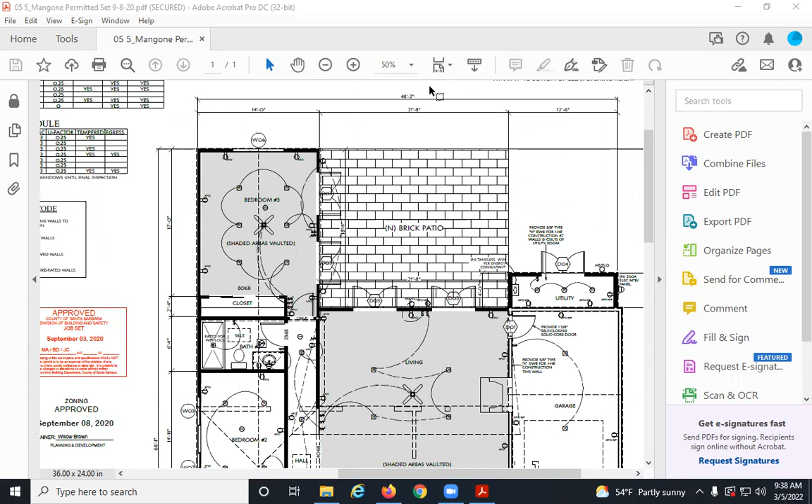I'll tell you, when we get into plumbing, which is really soon, I will show you some stuff about this house. But I'll tell you right now, since I'm on it, that this house had existing plumbing.

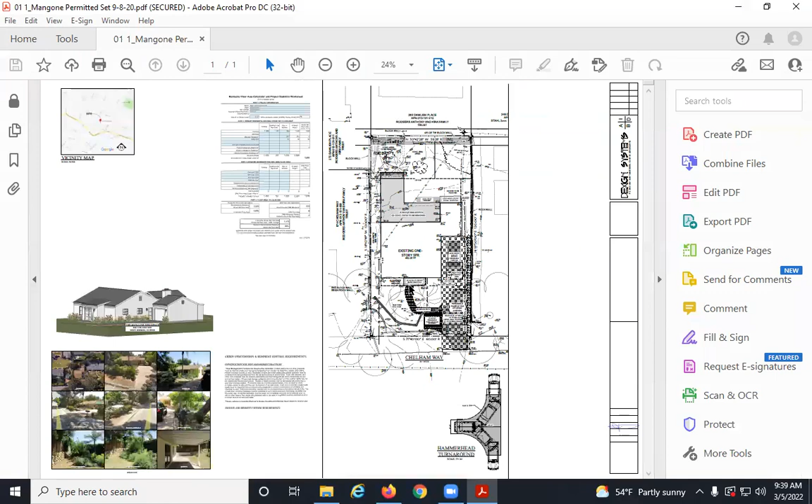So before this addition, there was a big clean out right here. You know what a clean out is? What's a clean out, Frank? It's kind of a threaded ABS plug that goes into the waste part of your plumbing. Clean outs have a plug, but a clean out is a way to get into your waste to snake it. And they're required on all your waste.

And by the way, I'll tell you right now, four things you need to know about plumbing: water, waste, vent, and shit rolls downhill a quarter inch to a foot. That's all you ever need to know about plumbing. If you know those four things, you can be a plumber too.

So waste needs to be snaked occasionally for roots and other things that happen in your main waste, where not just your sewage goes, but your showers and your gray water, all that stuff goes into your waste. And we had a big clean out right here.

Yeah, clay pipe cleanout. So we knew where the sewer was, and the cleanout was just opposite this existing bathroom. So I figured that everything came across the building from the laundry side here, this way, and the kitchen sink this way. It came straight across, bathroom here. Everything went under the slab. All this waste went under the slab and came out, and the bathroom did too. And I figured everything tied in right outside there. That's what I figured.

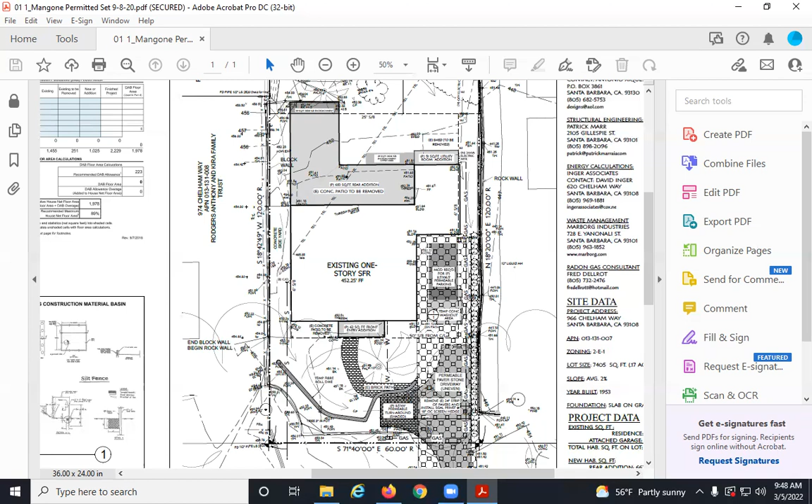So we put in French drains and excavated down about 14 inches. We put back in about 6 inches of 3-inch crushed rock, then a few inches of 2-inch crushed rock, then 3/4 crushed rock, and ultimately an inch of 3/8 pea gravel, about 60% Hanley gold and 40% washed pea gravel, for a finished look. What we made was a big collection basin where water could go and disperse, more like a dispersion basin, with nooks and crannies that water could go through to get down to groundwater. So far, so good. It's worked really well.

Did they plant around it at all? Well, you have to see it, there's a hedgerow and a couple big olive trees. Yeah, they've got some plantings, but mostly just plantings and gravel. She just wanted gravel everywhere. She's really interesting, I really like her, I had a blast working with her. She's got excellent taste, just an absolute sweetheart. Her husband's a super nice guy and an incredible golfer. I hope they watch my YouTube channel so they can see how good I plug them.

When you say Hanley gold, are you talking about the California gold kind of gravel? Yeah, Hanley gold and California gold are pretty much synonymous. It's a gold colored gravel, typically in 3/8 size.

But here's our roof plan, and we did some interesting modifications. I pretty much had to design as I went in some ways. This is the kitchen along the driveway. She wanted another window, so we put 3 windows on that side.

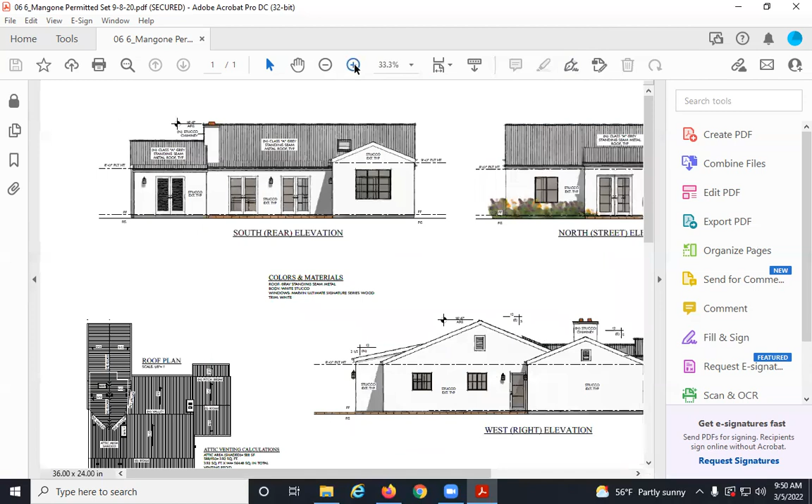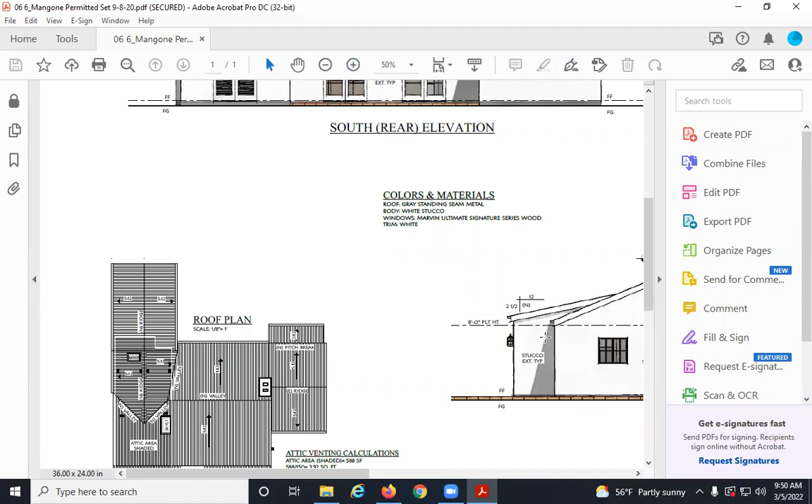Some of the things required on plans are elevations, north, south, east, west, just like that, and that has to be on a plan. That's pretty important because it's the only place you'll find things like the height of the ridge, the plate line, what your gables do, and the height of doors and windows. This is the only place you show your plate height. You don't see it on floor plans, and you won't see it anywhere unless you have a complete section through the walls, which in some cases you should. I like those on plans, but showing plate height is pretty important.

This also shows what the roof does and what the pitches are, and it tells you about required venting, how much venting per square foot you have to have. We had to have a bunch of vents because we didn't need to vent our volume spaces, but we had to vent our unconditioned spaces where we had attics. Rather than show a bunch of dormer vents, we did an attic ridge vent, so the ridge acts as a vent. It's got honeycomb, sticks up a little higher, and that got us the square inches we needed to vent our roof, because you have to vent unconditioned attics. You have to vent them at either end if it's a gable, to get air passing through, and then vent them out too.

It's really important to keep the difference between ambient outside temperature and the inside conditioned temperature from being too radical a change. Attics especially really heat up, so you've got to have a place for that heat to dissipate, which is what those roof vents are for, and the gable end vents move air through to circulate dead air.

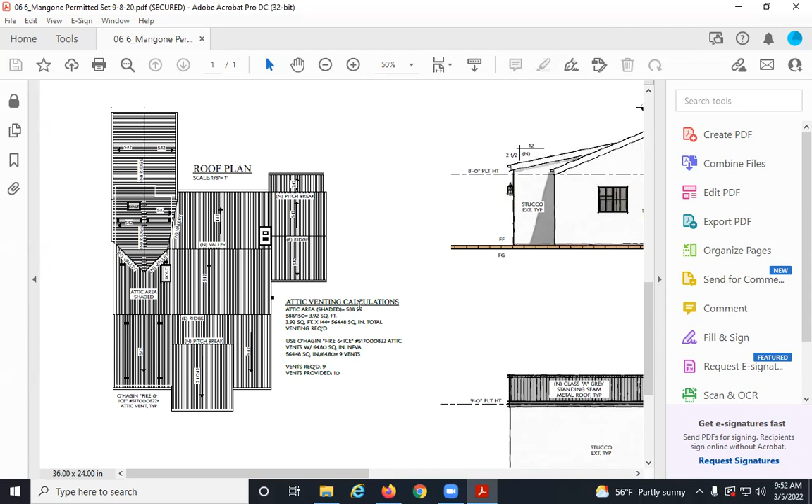Then we had to do stuff like, because there's nothing shown for insulation, what they show on the boilerplate is standard roof insulation, like an R30 or something. We can't do that here because we're showing all the way up, the bottom of the 2x4 rafters, the sheeting on top of that, all the way, we're not covering anything. Because we're leaving these trusses, which you saw pictures of, the site-built trusses that were all stained, we couldn't skin the bottom of the rafters because we'd have to cut around way too many connections, there's connections every 2 feet on these trusses.

So we had to insulate above, using a rigid insulation that would conform to get the R value we needed. We did extra sheeting on top, and then put in 2.5 or 3.5 inches of insulation, which gave us the R value. We had to build 2x4 on end nailing on the roof to drop in the insulation panel.

So we had nailing, and then plywood on top of that, and then the roof on top of that, the metal roof on top of that, which is a 17-inch standing seam roof. And as we go along in classes, you'll see more and more.

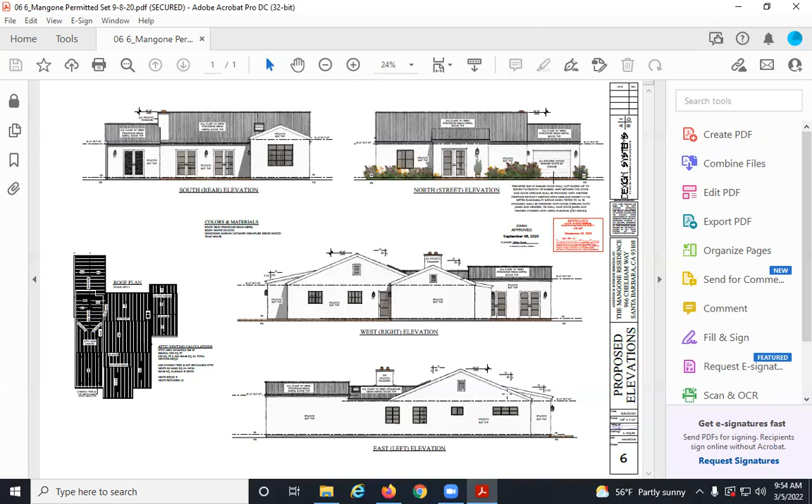Well, there's all the roof pitches. I'm spending some time on this, but I wanted you to get a sense of the site and the plan, and then we get into the meat of it. We get into some details, which that detail never happened.

I don't know why that's there. That detail never happened.

Did you have to shore all those trusses in order to get that beam up in the back? Yeah, we just had to build a wall all the way across, because the trusses ran lengthwise and set on that wall. So we built a temporary wall, removed it, put in the post and beam, and all that stuff. The footers were already there, and then we took away the temporary wall and hung all the ends of the trusses.

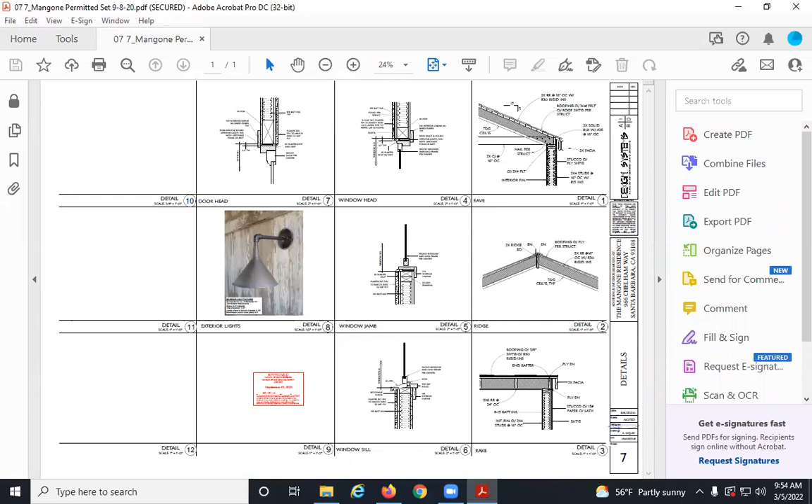I think you might show a detail, and this is actually more like what we did. This is an actual detail, this one here. But even then we modified it because she wanted, she didn't want that space. And she wanted it as narrow as possible, she didn't even want a fascia, so I had to have the framers rip off the fascia and then rip it down to make it even narrower.

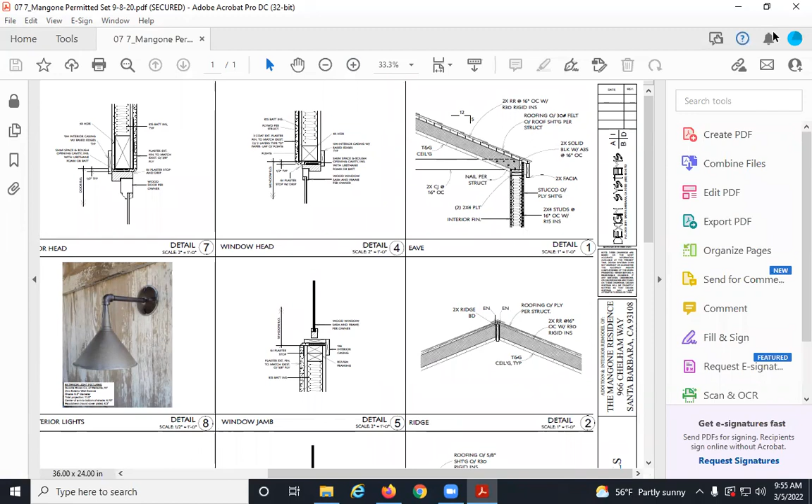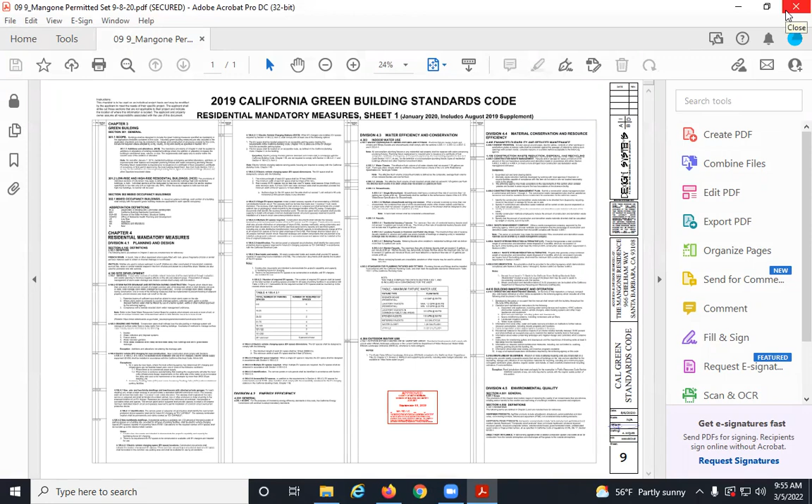See what else we got here. So then again, green building code stuff, a bunch of boilerplate stuff, and then we should start getting into engineering here. No, a bunch more mandatory measures, water efficiency, material conservation. It gives me a stiff neck just thinking about all the stuff that they have asked us to conform to.

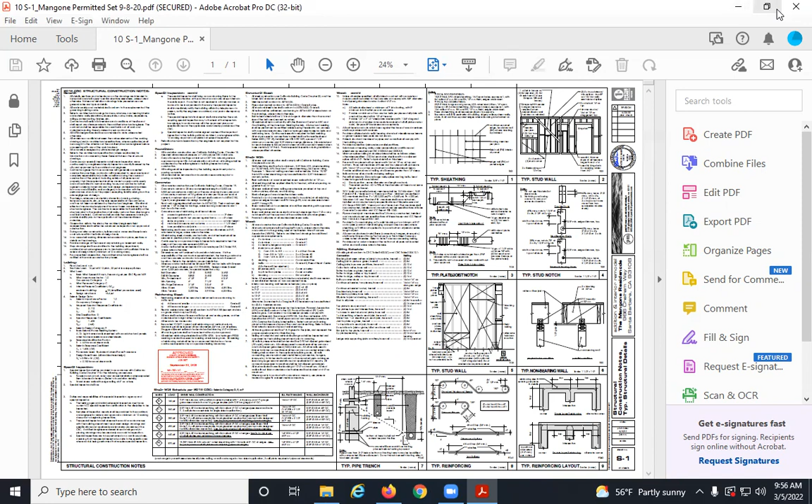Now, this is boilerplate, and it has to do with how you use steel and footings, how to bend steel and what's acceptable. Again, pretty much all boilerplate. Now we should be getting into, that's S1, so that's boilerplate. Now we get into some actual details, tying into the existing footing with the new slab. All these are actually real details that we actually used.

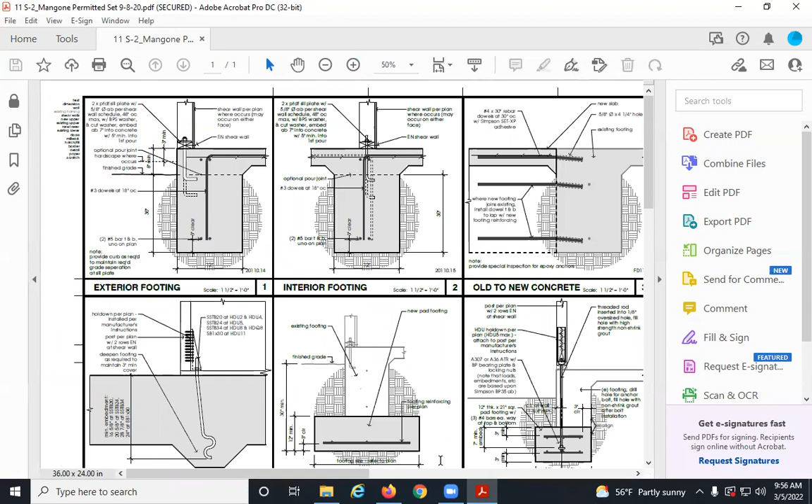And then you see, we start getting, this is where our foundation plan is. In the foundation plan, you have these things like, see that P1? See all the triangles, P1, see the P3 there? Everybody see that? So the triangles, P1, right?

And the HDs, did Jim tell you all about those, when you guys went over the foundation stuff? HDs are your hold downs, and they're rampant. There are lots of them in every foundation. And they have an anchor bolt that's an S shape that goes deep into your foundation, that's poured into concrete, and then it has a threaded 5/8 bolt sticking up.

And that gets an HD, a fabricated metal device that's screwed to a couple of studs together, or a 4x4 or a 4x6. It'll call it out, and it basically ties that part of the building wall to the foundation really well. And the whole idea is that if you get in an earthquake and your house starts jumping around, it won't jump off the foundation. That's what the HDs do.

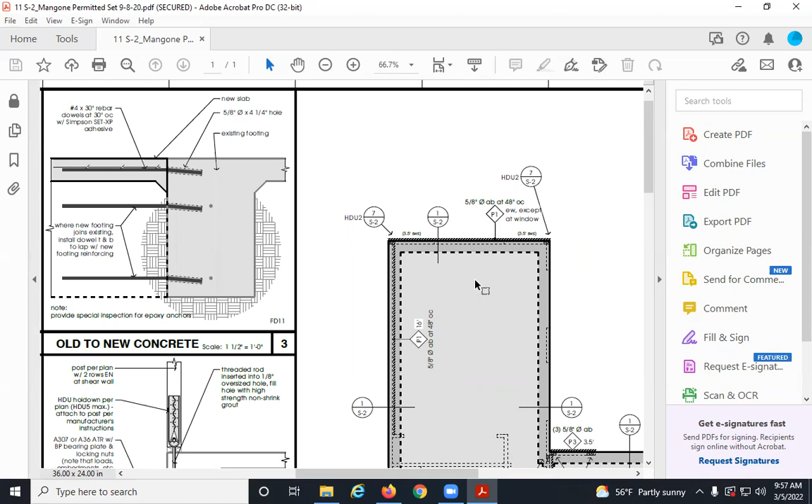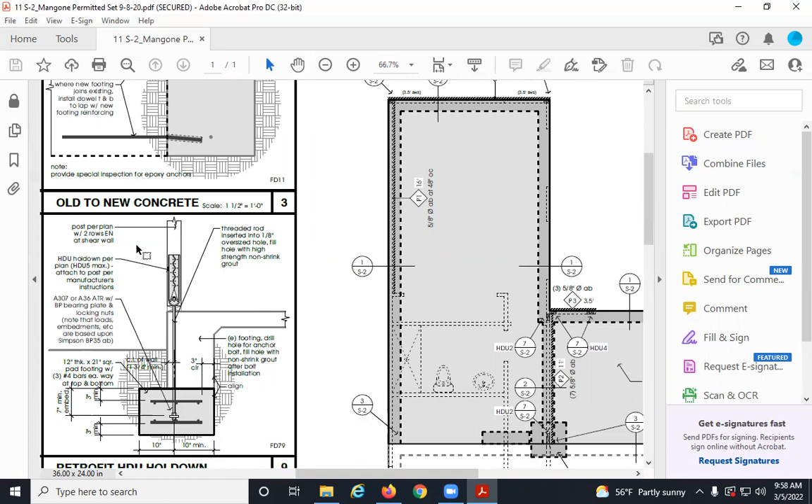And there's what they look like, right? And then these stabs go all the way down, big stabs. And then these guys are screwed with SDS screws, really gnarly. It drives itself, screwed with an impact driver, into the posts, right? And it shows you edge nailing, and then the P's, all the triangle, the diamonds, those are all for your shear walls.

So all your walls are sheeted, but some of your walls, interior and exterior, are considered shear walls. And they shear and rack the building. Again, it's for seismic, to keep your building from collapsing.

And they're very specific, and they're looked at by inspectors specifically, and they're almost always called out on your plan as needing a special inspection, just like your hold downs do. So your foundation hold downs require a special inspection, and all the nailing, basically all your straps, hold downs, and builder's hardware are going to need to be inspected.

That's going to need to be inspected and signed off that they're there and seen by a special inspector, not a county or city building inspector, but somebody you pay, like Rusty at Coast Valley or Pacific Materials Lab, Ron Pike. Those are pretty much the two guys that do it. There are other guys that do it, but those are the two companies mostly used around here, and they have to sign off that your shear is done properly per plan.

And per plan is how many feet of shear there is. Now, the whole building is sheeted with the same stuff that you shear with. The shear has to be a certain type of material, and it has to have the stamps outside where you can read them. And then it has to have edge nailing and field nailing per spec. The edge nailing, EN, is usually anywhere from 4 to 6 inches, all the way to 12, but usually 4 to 6 to 8 inches on the edge nailing, and then field nailing is anywhere from 4 to 8 or 12, but it's very specific.

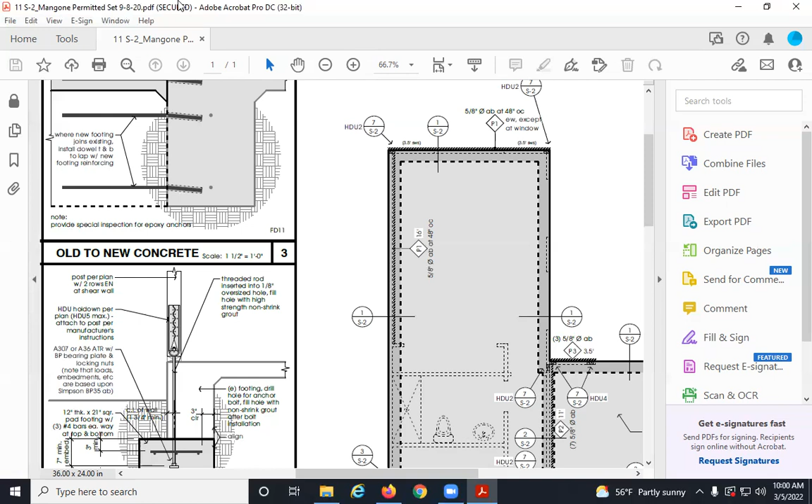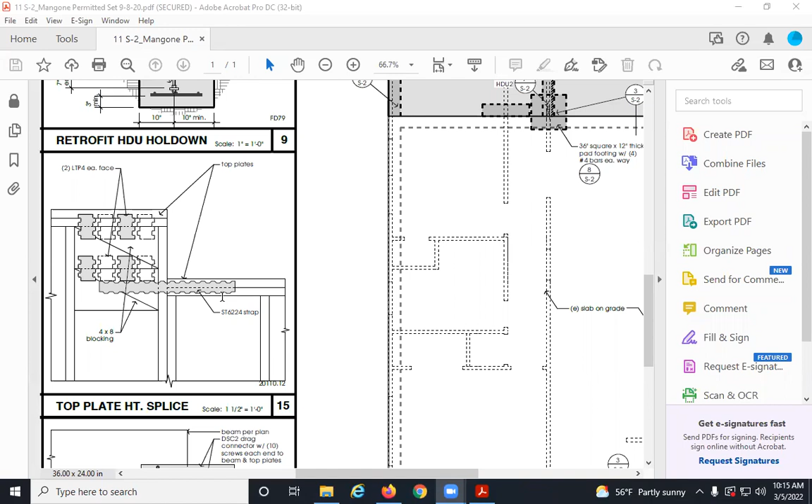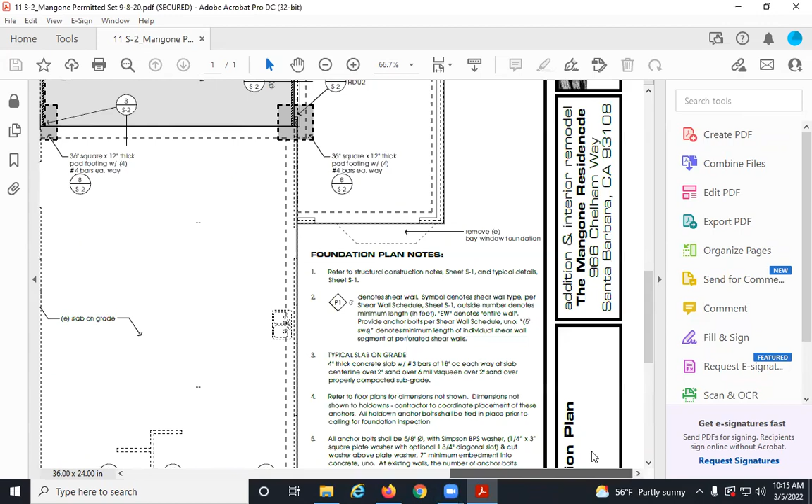Okay, so these straps, like for instance, this 15 here, right? Reading a plan, this is going to be whatever the sheet is. I think it's S2. So S2, detail 15.

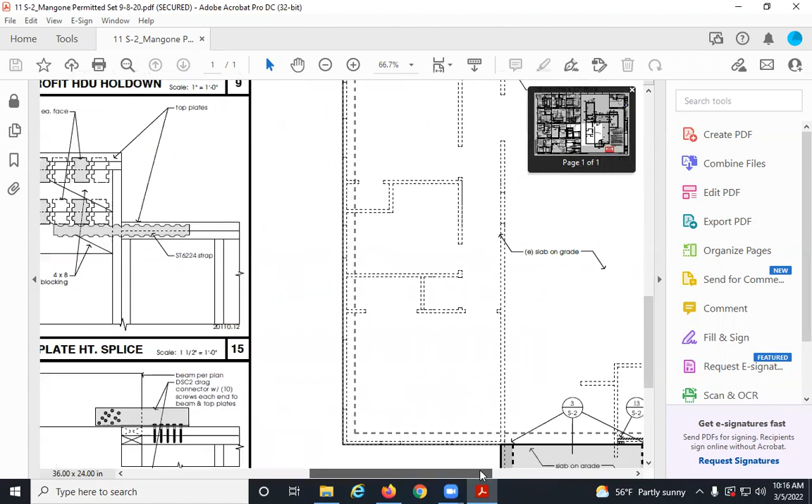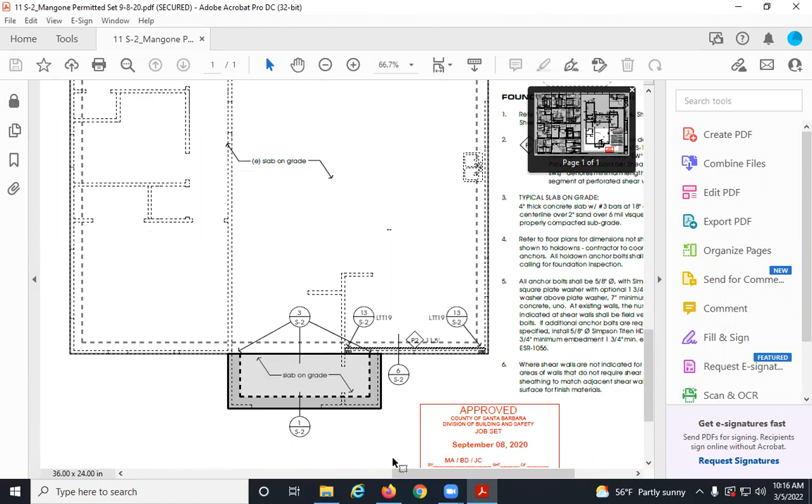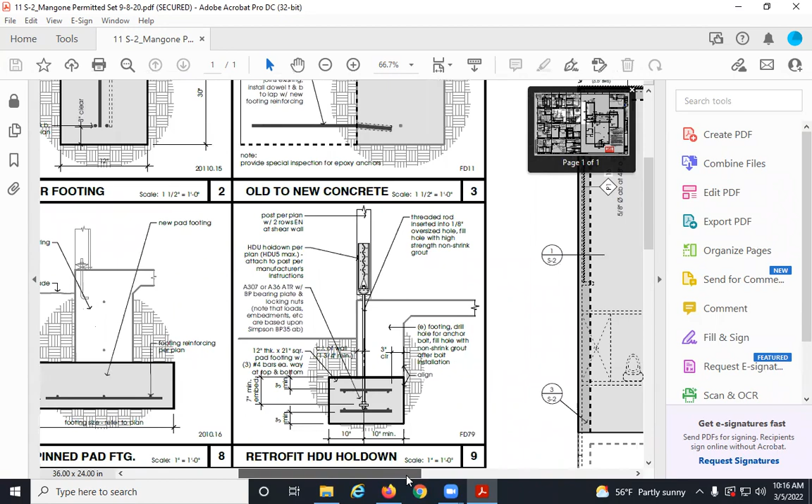Top plate splice, right? Let's see if we can find that anywhere, just for the heck of it. There's 13 on S2. I don't see 15S2, just out of a cursory search. So let's see what 6 on S2 is, detail 6. Back and forth. Wait, where's 6? There's no 6. Well, that helps a lot. On S2, I don't see any detail 6.

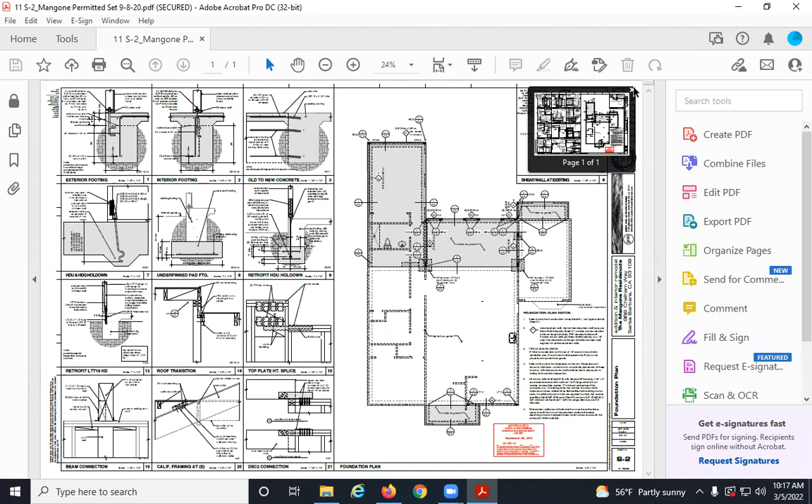So what's going on here? Am I just... 1, 2, 3, 6, 7? Wow, how about that. On the right. Where, here? Yeah, right, oh there, yeah, shear wall? Yeah, that's detail 6. Thanks. Wow, interesting place to put it.

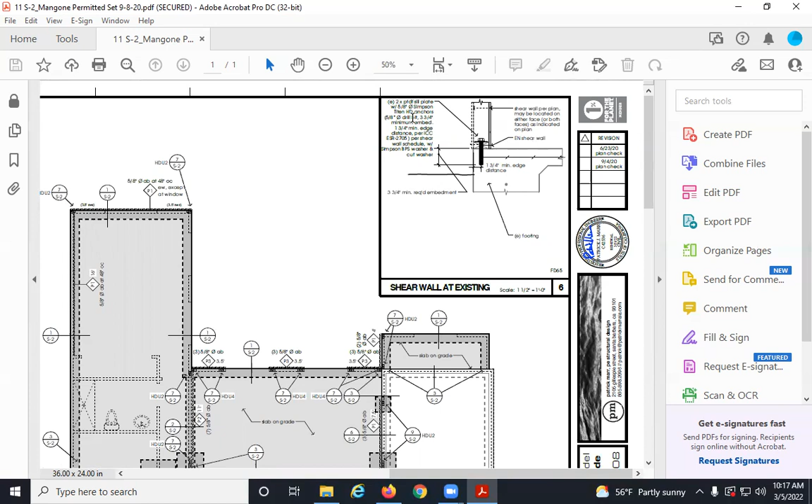So that tells me what it needs there. It needs a Titen on an existing shear wall. It calls out the plate with a 5/8 Titen.

So what it's telling me is up here, right here, that's an existing 2x4 wall. We didn't have to take that wall down. It's an existing wall, it's the plates that are existing. It's an existing shear wall, but it's an existing wall that we sheared on the inside. We had to leave it open on the outside. We had to kind of jump through a few hoops because it was inside on the shear, but we also had to get in there and bore and put in Titens.

Titen, it's a Simpson product. They're masonry anchors. We had one around here to show you, but they're pretty cool. There's a lot of different masonry anchors. Titen's rated pretty good for holding power. It's engineered really well, but you bore a hole and then it cuts its own threads into the concrete. It's a pretty big bolt.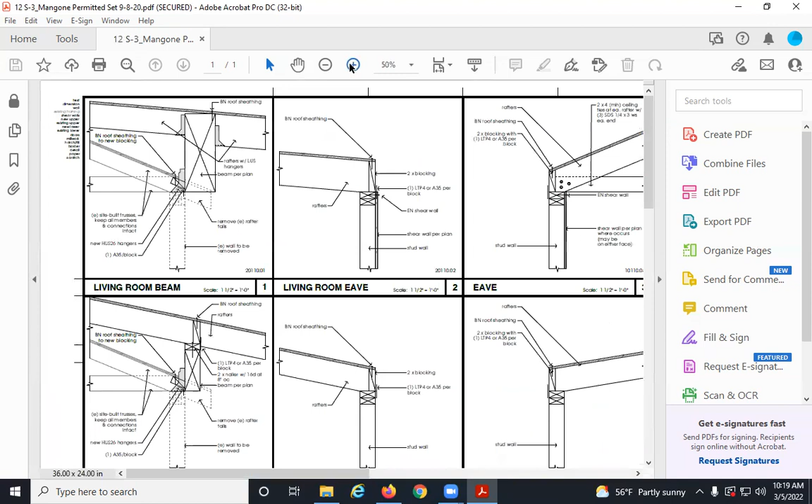We're going to take the beam out. We got that, showed you that Parallam beam that I boxed out. And when you guys saw it, when we were doing Rich, you saw a big old 12-inch duct was hung off of it. And there was a Smurf tube up there. And there's a whole lot of stuff run behind it that you couldn't see.

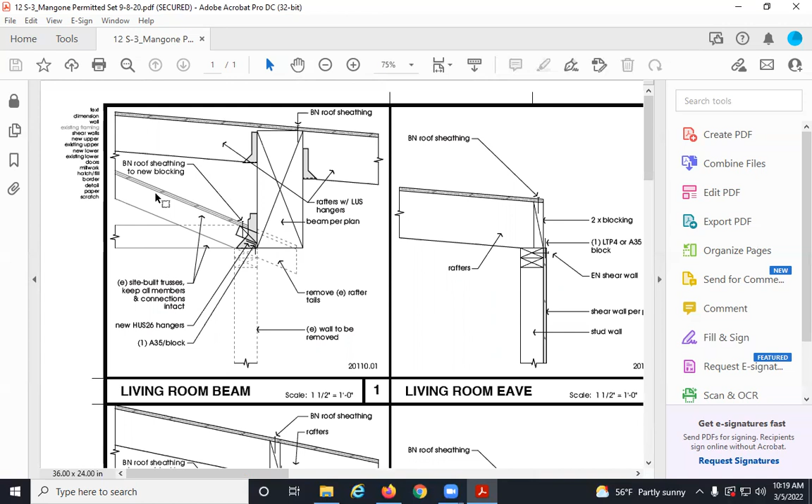And then see, that was the wall that we took out, Alec, that you asked about. We had framed a wall in front of it, temporarily hold it in 2-foot centers, took that wall out after this beam was hung and attached to its post. And then the existing trusses were hung onto that new beam, just like that, and the rafters continued. So there, this actually is a real eave, real zero eave that we did.

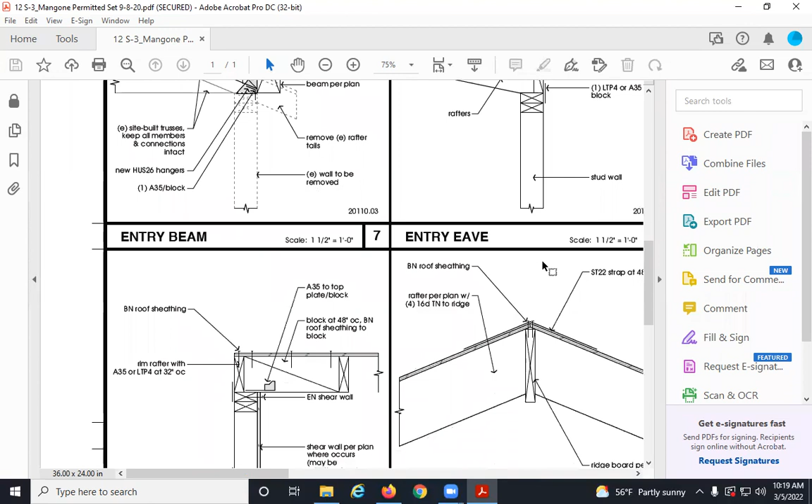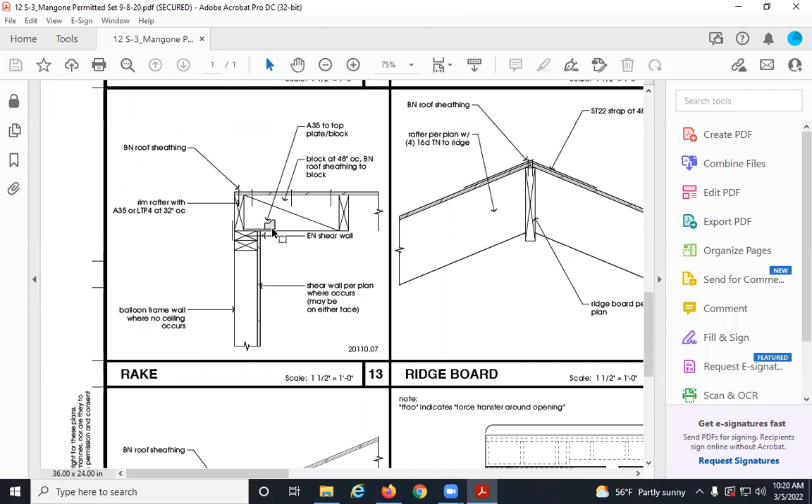See these A35s right here? Those are required from plate to block at every bay. So those frieze blocks they showed you in a house, an A35 clip, it's a small nail-on Simpson angle clip. They're required at every rafter connection and at every block connection too. Required, have to be there, and the inspectors look for them.

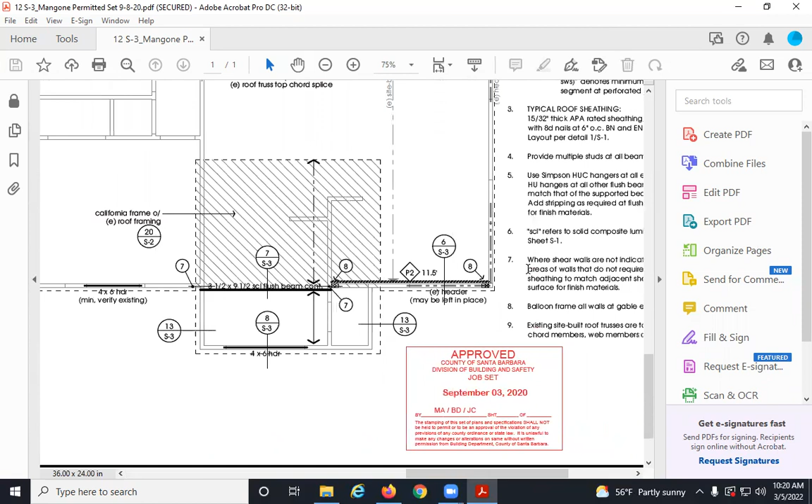There's a garage. So anyway, they gave a lot of details. The engineering was done by Patrick Marr, whom I like a lot. He's a really good guy, and he's accessible, which is one thing, you know.

It's amazing how many people aren't accessible, right? Architects and engineers you're dealing with that aren't accessible because they're busy. But having them be accessible matters because you get questions about this stuff and you don't want to make a mistake and have to go back.

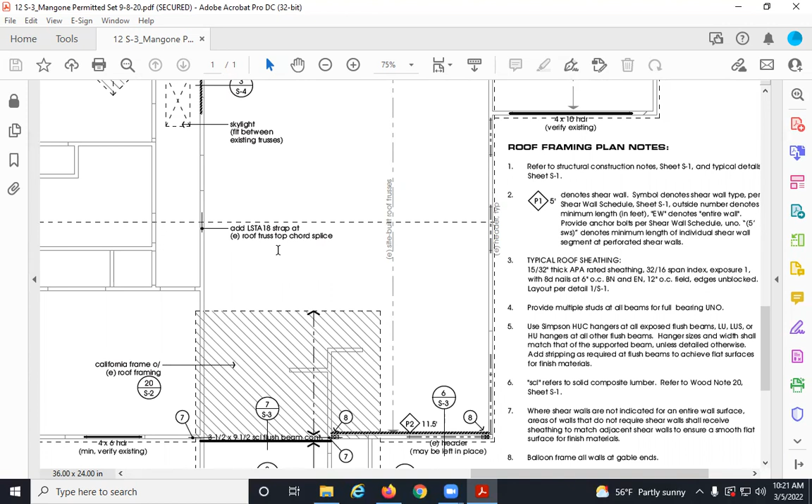But all these straps, everything that this calls out, all of these shear walls—there's an 18-inch strap and there's a header that may be left in place. There's a flush beam right there, there's a detail for it. Headers, and then there's some big old straps like over here. There's some MSTs. Header. There's something somewhere showing some strapping.

This is what I find when you deal with county or city building inspectors: you're not just dealing with someone who's supposed to know and apply the codes. You're dealing with a person, just like every interaction you have with anybody in business—it's a person.

People do business with people. So when you're working with an inspector, you're working with a person, and they'll have their foibles and their pet peeves, and things they're kind of good at and look for. Some guys will really be on the electrical, some guys will really be on plumbing. What I find is they get really interested in whatever they're good at, and that's what they look for. They don't really look for all the other stuff. They have their things that they look for, and that's fine with me.

Because they can't really look at everything. We can't expect them to. We have to build responsibly, we have to build to code. We can't let things fall down and get people hurt, or hurt other people while they're being built—that's our responsibility. The inspectors are just supposed to check if it went to code, but they can't look at everything. They can't look at every stud, every nail, every screw. They'll look at specific things, their pet things—the things they know about, loads, electrical stuff, heights off the ground for the meter.

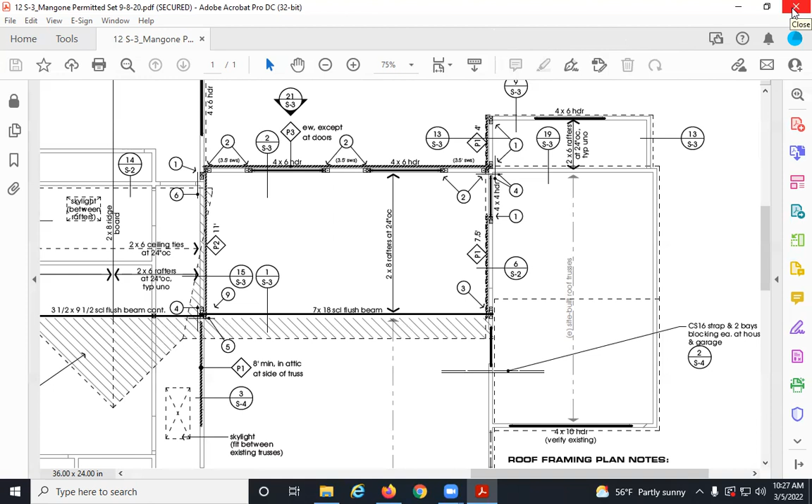But never forget, you can make problems for them too. Not that anybody wants to make problems for anybody.

This also reminds me of this meeting I was in one night, a big AA meeting, 200, 300 people in an auditorium. There was a speaker on the circuit, a female speaker. And she said, if you're here tonight looking for love, the odds are good, but don't forget, the goods are odd. I thought that was pretty funny. But I can see you guys are still thinking about it.

Okay, so I have these here, and I haven't done anything with them because I wanted to show you. So I'm going to show you these, and then we're going to start routing. I've been meaning to do this for weeks, and I couldn't even remember why. Okay, that's why.

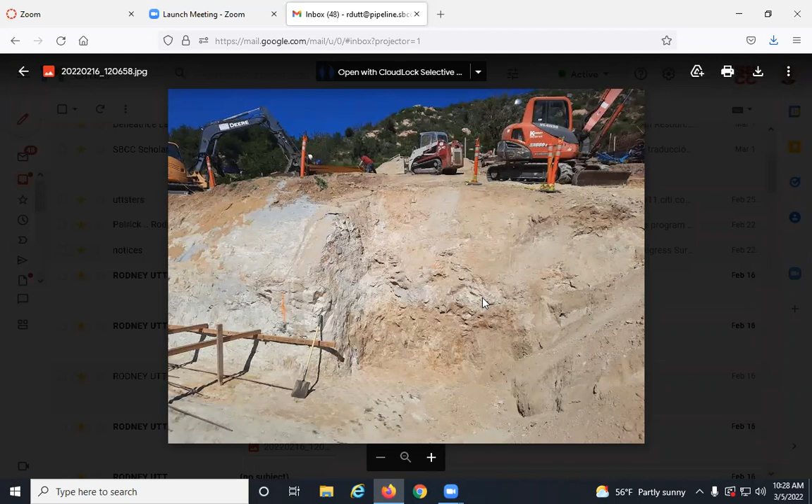This is that job I talked to you about, that I went out and looked at with Duncan Brown, where it's going to be, I don't know, probably 15 million. It's a 23% slope that this is being built on. It's an unbelievable place. That's all bedrock from there down. This is the one I told you about. There's $495,000 spent on the rock claws so far.

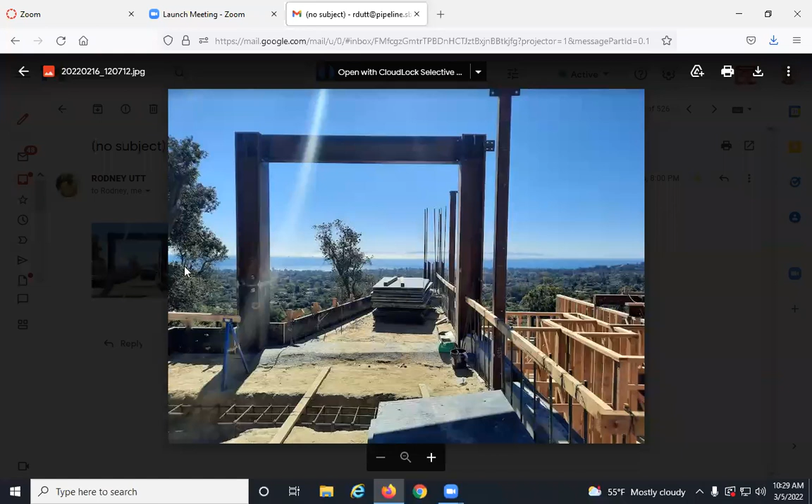Some of the footings, excavation, those are number 8 bars. Look at this, just a small sampling of the amount of concrete. This is just starting to get out of the ground in a 3-level place. It has all kinds of moment frames, big 1 1/8 inch steel moment frames.

Did I show you guys these pictures? I don't think I did. I sent them here because I meant to. The same guys that are framing this framed that project that I just showed you the plans of, HR Framing, good framing crew. As you can see, this is just one level. The amount of steel, the amount of framing, and the amount of LVLs, it's just over the top.

So much steel. But look at the slope, look at the grade. It's a crazy sight.

So I got asked to come there to look at this stair, doing that curving staircase, because that's what I left, doing work as someone who specialized in curving handrails and staircase systems. The guy building this house, the project manager for Dennis Allen, is Duncan Brown. He was working with me. He and I together were doing these curving staircases, and this is some 30 plus, maybe 40 years later. He called me and asked me if I knew anybody who was doing these stairs.

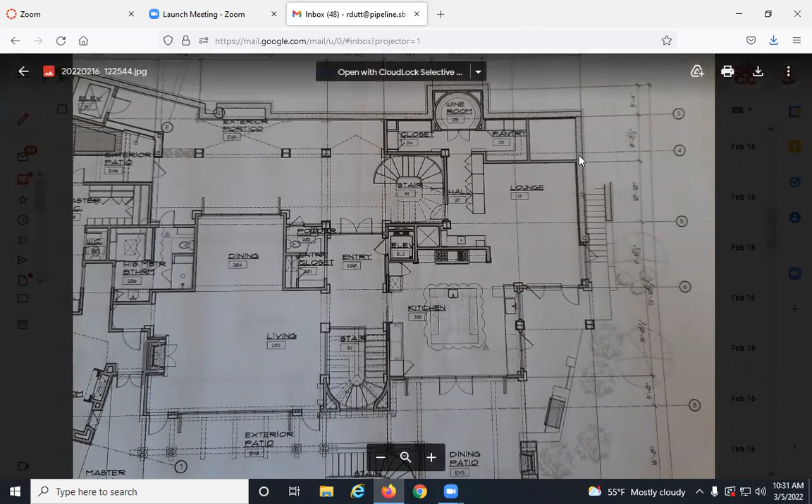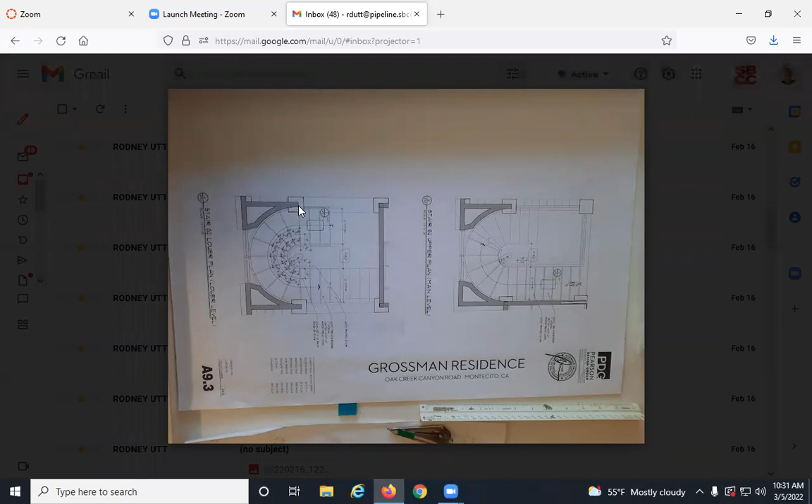I said, well, yeah, let me look at them. I might want to do them, but I don't want to do them. One of the reasons I don't want to do them is, here's another look at the staircase. Let me turn this, let's see where to turn it. They give a fair amount of detail, but they're freestanding stringers, not attached, so basically it won't work.

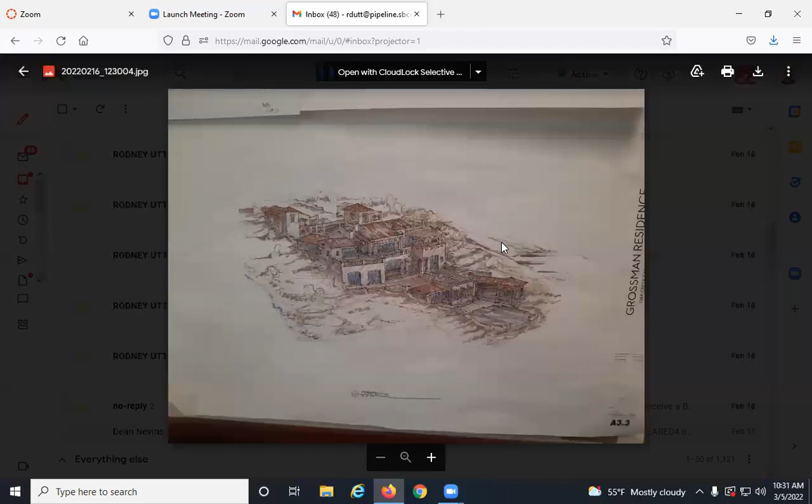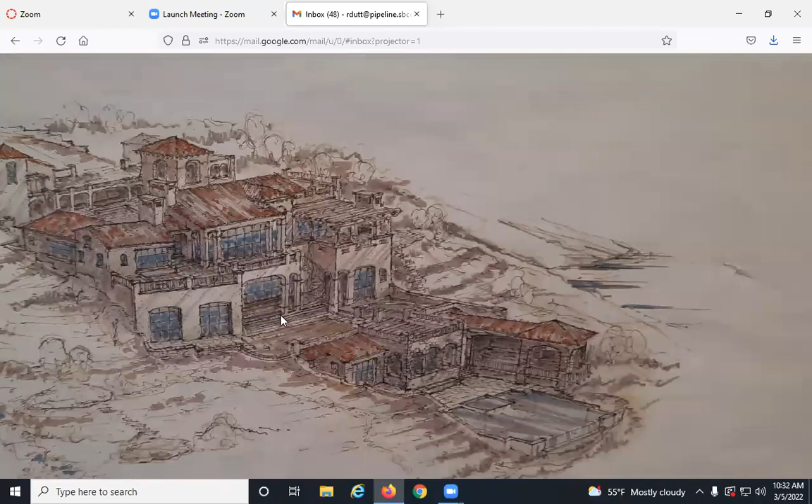So this is a rendering. I thought this would be fun to have, but you saw the pool, what was being built. What you saw was all this stuff being built. You saw the ceiling joists for this part of the construction, you saw some of this being built. This is the main living area, this is the pool area. There's an elevator shaft right here, it takes you down, takes you up to the motor court. It's just an unbelievable place.

Huh, I thought I had. Okay.

Okay, so routing. I showed you the plan on these. We're gonna now do routing posts. We'll probably go outside, we'll see. And put some big chamfers on the ends of beams.

This is a chamfer bit. It's a 45-degree chamfer bit. You can buy them in 30 degrees as well. It's not a huge chamfer bit. It's a quarter-inch shank, 5/8 cutting.